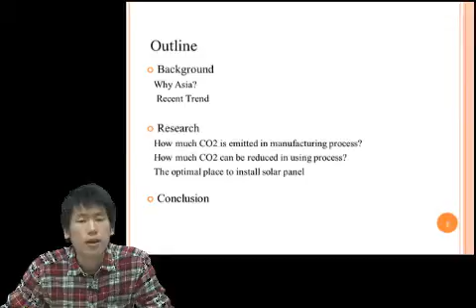So first of all, why Asia? Why do we have to think about solar power generation in Asia? Because solar power generation can be a good solution to resolve some serious problems in Asia. Nowadays, Asia has two major energy problems. One is increasing energy demand. From 2007 to 2035, energy demand is predicted to grow at 2.5% per year in Asia. The world average is just 1.5%, but in Asia, 2.5% per year.

Another problem is the environment problem. There are a lot of island countries and island areas in Asia, and they will be in trouble because of increasing sea level in the future. So now we have to deal with the increasing energy demand with renewable energy. And at that time, solar power generation can be a very good solution to resolve these problems.

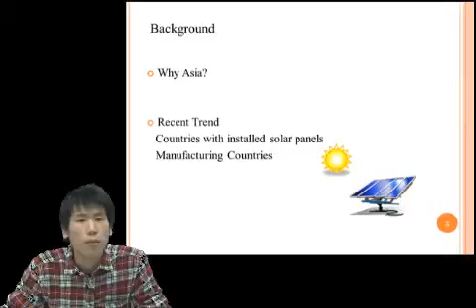So let's go to the next point, recent trend. According to the International Energy Agency, in 2008, Germany and Japan accounted for over 50% of the solar panel market share. So it is mainly developed countries which have installed solar panels in the world. If you look at manufacturing countries, China and Taiwan are the main countries manufacturing solar panels. Okay, let's go to the next slide, and I'm gonna explain the recent trend in more detail.

In this slide, the keyword is emission factor. Emission factor is the amount of CO2 emitted when generating 1 kilowatt-hour of electricity. It's very complicated, but this is environmental impact. And because China is still using coal-based power plants and not efficient power plants, China's emission factor, China's environmental impact, is very high.

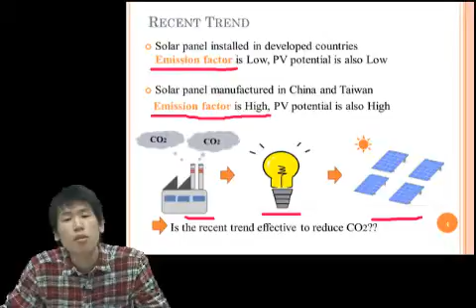So let's go to the animation. When you manufacture solar panels, you need electricity, and when you generate electricity, you have to emit CO2 in the factory. If you generate electricity in Japan, you just emit 1 unit of CO2, but the emission factor is high in China. So if you generate electricity in China, you have to emit 2 units of CO2. This is the recent trend. So is this recent trend effective to reduce CO2?

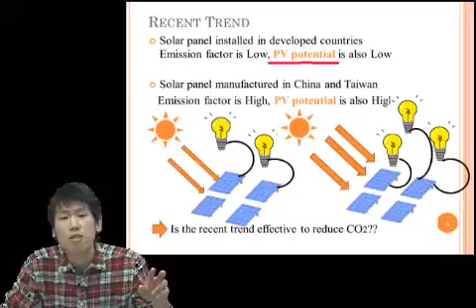There is another story. In this slide, PV potential is the keyword. PV potential is the amount of electricity each country can generate with a solar panel. If you go to a place with high PV potential, you can get much radiation, and you can generate 3 units of electricity, for example. But Germany and Japan don't have high PV potential, so you cannot get much radiation, and you can just generate 2 units of electricity. So again, is this recent trend effective to reduce CO2?

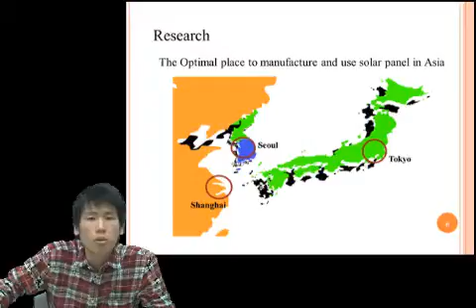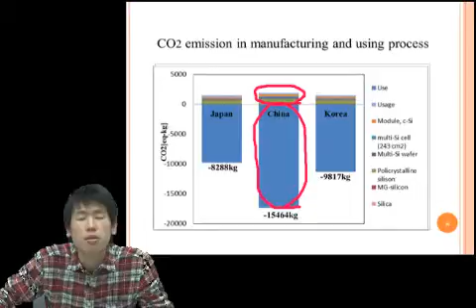This is CO2 emission in the manufacturing and using process. The upper bar shows the amount of CO2 in the manufacturing process. And this bar shows the amount of CO2 which each country can reduce with a solar panel. Now you can see it's very big. Compared with the amount of CO2 which each country can reduce with a solar panel, the amount of CO2 in the manufacturing process is very tiny. So now we understand how important it is to focus on the using process, because this amount is very huge.

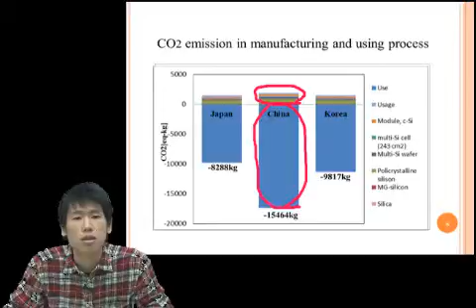And in this case, China has solar panels. So China does not have to get electricity from coal-based and inefficient power plants. That's why China can reduce such a huge amount of CO2. So let's go to the next slide. This is not it. Okay, this one.

So now we understand how important it is to focus on the using process to discuss the optimal place to install solar panels. Now there's another more important point, that is the country's electricity consumption. Imagine a country whose PV potential is very high and whose emission factor is also very high. But if the country does not consume a lot of electricity, the country's room for CO2 reduction is very small. That's why we have to care about the country's electricity consumption.

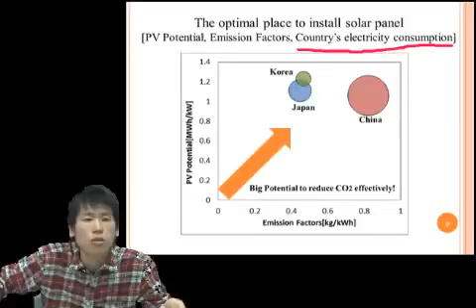Each country's balloon, the size of the circle, shows the amount of each country's electricity consumption. In this case, as you can see, China has much more potential in terms of PV potential, emission factor, and electricity consumption. But what if Chinese people do not consume a lot of electricity? There is no incentive for Chinese people to set up or use solar panels. So let's go to the next slide.

I changed this to electricity consumption per person. In this case, China's potential is down. On the other hand, Japan and Korea's potential is up. So we can see different results from different perspectives.

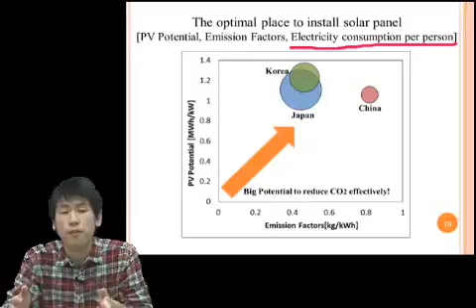Okay, let me conclude this presentation. The current trend is not exactly effective to reduce CO2. Manufacturing solar panels in China and using them in Japan is not effective to reduce CO2. We have seen two processes. One is the manufacturing process, where Japan emits CO2 the lowest and China emits CO2 the most. But the most important point is the using process, because the amount of CO2 each country can reduce is much bigger than the amount in the manufacturing process.

So China has more potential in terms of PV potential, emission factor, and electricity consumption. And Japan and Korea also have potential in terms of electricity consumption per person. These are the topics I've learned from this presentation. I'd be really happy if this presentation is a good opportunity for you to discuss global energy issues with your friends, your family, and your neighbors.